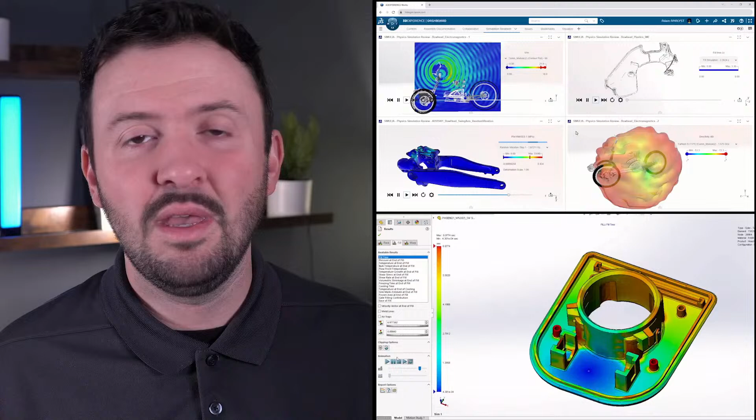Today's guests are here to provide 3 sneak peeks at World, the big announcement areas to look forward to, a special preview of our technical session agenda, and more broadly, other great ways to take note of when it comes to experiencing the best of simulation solutions and technologies at the event. Our guests today have 2 remarkably different backgrounds when it comes to simulation. Our first conversation will focus more on usage and technique adoption, while our second planned conversation will delve deeper into new features and functionality planned for simulation users.

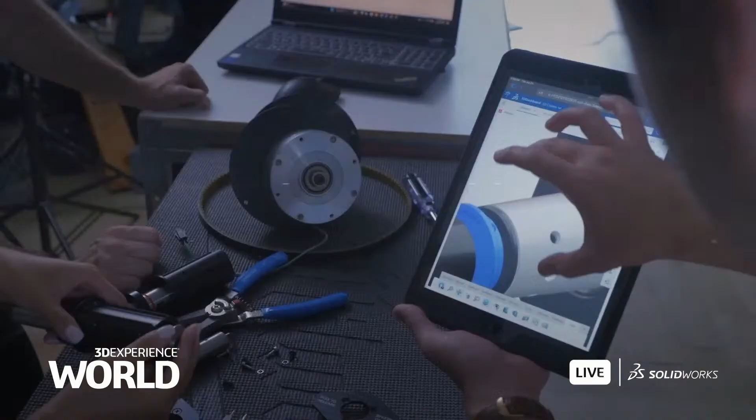I mentioned we had a bit of a talk before we came on about the different topics we cover, and one of the things I said to you is it might be good to bring everyone up to speed. As we know, within design, simulation, manufacturing, there's a ton going on all the time at a software level. So within your eyes, over the past year here in 2024, what were some of the key highlights, or newsworthy items as it pertained to simulation?

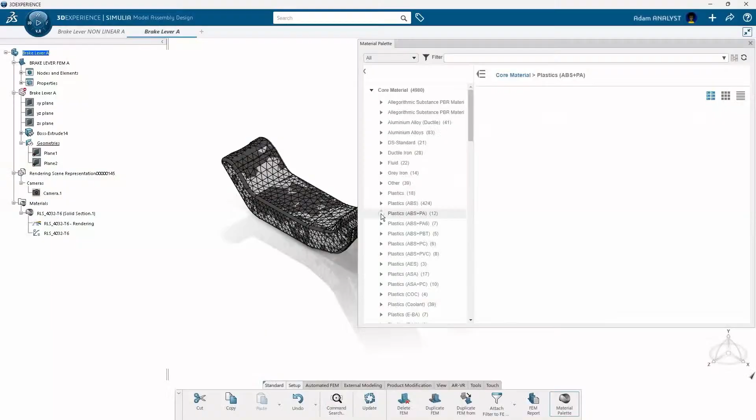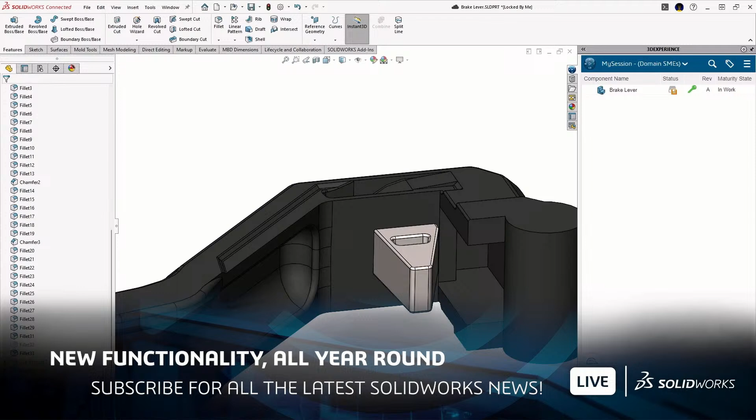That's a great question. I would break it into 2 parts. First, in terms of the portfolio, the simulation portfolio that's now being offered as a part of 3DEXPERIENCE Works, it's pretty comprehensive, from structural simulations to fluid flow and thermal analysis, to electromagnetics, to plastic injection molding, to motion simulations. So this portfolio has been quite comprehensive. What's new this year is there are a lot of new capabilities in terms of preparing the geometry for simulation, overall performance, pre and post processing, really improving the user experience and expanding the number of applications that our SolidWorks users can address, leveraging the 3DEXPERIENCE platform.

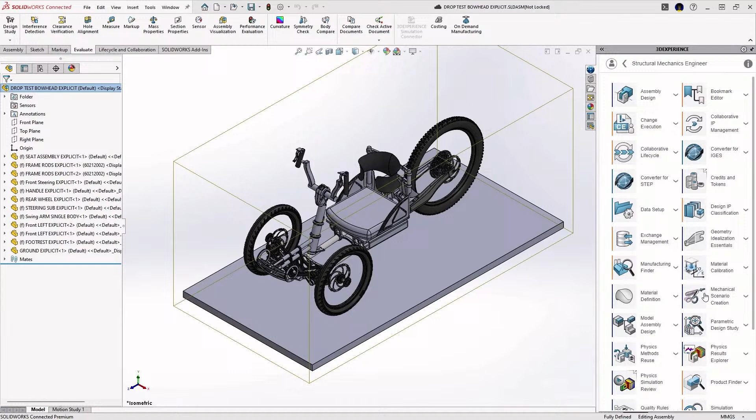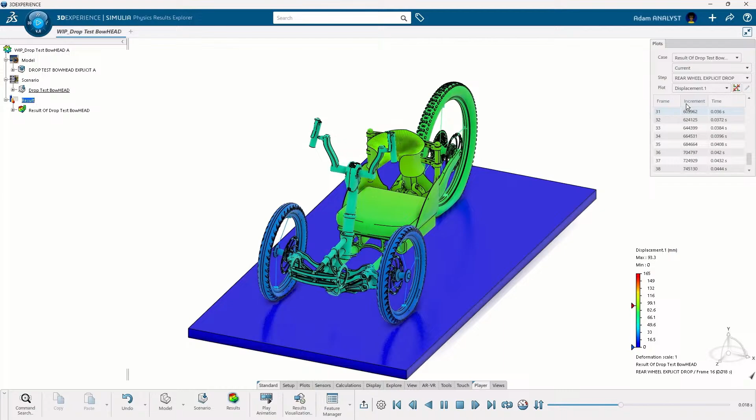No doubt there's been a significant increase in the capabilities we are offering in the simulation portfolio, on the Works package. But on the other side of things, which is our customer awareness and customer engagement, that has ramped up quite significantly. In fact, this year I'm very excited to share that we did Simulation Week in Latin America, in Australia, in Europe, in India, and in parts of Malaysia, where we had the opportunity to meet and interact with thousands of SolidWorks customers, and they're pretty excited about what's happening in the world of simulation, especially bringing the power of cloud simulation and all the amazing SIMULIA technologies to the hands of SolidWorks users. So I would say these are the two major highlights of this year: the ramp up in capabilities within the simulation portfolio, and lots of customer engagements, thanks to our channel partners and resellers, because without them this would not have been possible.

That's super exciting. As a fan myself of meetups, I go to different industry meetups, not necessarily because I work here at SolidWorks, but just because I like to. I find them enriching. You never know what you're going to learn, whether it's about a given individual, an industry, or a software package. Hearing that we've connected with thousands of people across these different sites and geographies, that's really awesome.

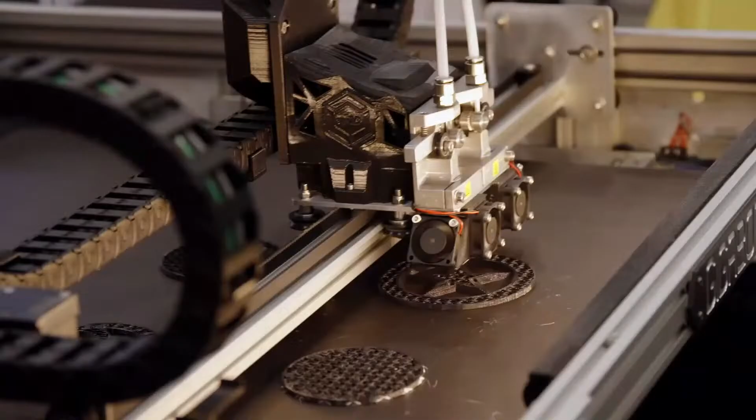And I can say for anyone watching this episode today, you're probably interested, if not already secured, to go to 3DEXPERIENCE World 2025. It's all about in-person networking, learning different things, and so forth. But Srikrishna, we are of course 3 months away, give or take, from 3DEXPERIENCE World. This is airing in December, middle of December. I wanted to ask you, people know that this conference, when it was called SolidWorks World, as it's now known as 3DEXPERIENCE World, they know that especially day one, and then bleeding into the rest of the days here at World, it's really known for those big splash announcements.

Now, I know you can't spoil the announcements here, but can you maybe tease some things? Tease some of the big announcements, or some of the new things that we'll be hearing about simulation at World.

Let me take a step back here. I think for me, one of the big deals this year is that until 3DEXPERIENCE World 2024, we would have domain sessions after the general session. This would happen probably in the afternoon or so. These are exciting, when we're talking about design, simulation, manufacturing, and so on.

But what would happen is when these domain sessions were taking place, you also have a lot of user breakouts. So the majority of users would miss out on the big updates being made in a particular domain session, be it simulation or manufacturing and so on.

This year, for the first time, we are going to have a big multi-domain segment within the general session. It's going to be a 90-minute long segment from 9 a.m. to 10:30 a.m. on Tuesday, which I believe is day two. Simulation is obviously going to be one of the key pieces.

So I'm quite excited about simulation being part of this general session where we're going to have a lot of fun. We'll have a couple of customers come in, and also we are working on a skit, which I hope our SolidWorks audience can find amusing. And the two customers we are showcasing have completely diverse and contrasting sets of products that they're working on. That's all I can say at this point in time.

You mentioned how people can come together, learn about different technologies, learn from one another, learn about different industries, how to use tools to advance your own products, your own dreams, your own visions. One thing I'd like to get more detail on here is the technical sessions, which we know within our audience is a big reason why people take time out of their work days to travel to that one place where you have thousands of like-minded, skilled individuals teaching, whether in classroom sessions or hands-on sessions. So what can you tell our audience to excite them about when it comes to simulation there?

Sure. This time we have quite a lot of exciting and wide-ranging technical sessions planned on the simulation domain. We've got a total of 16 sessions, which are going to be product briefings, where we'll have customers coming in presenting their use cases, the challenges they were able to overcome by leveraging unified modeling and simulation, and the engineering and business benefits they got from our solutions. We'll also have some Dassault Systemes partners come in and talk about tips and tricks, especially for our desktop products, be it SolidWorks Simulation, SolidWorks Flow, and so on.

Then the third segment, which I'm very excited about, is where we're going to talk about the transformation of our standard or legacy SolidWorks customers into the platform, and how simulation can be one of the key drivers or first entry points into the platform. We've got several sessions on this transformation topic, more domain focused, from a structures standpoint, fluid dynamics, electromagnetics, and plastic simulation, and so on. So these are all the product briefing sessions, which can be broadly classified as tips and tricks, which has always been the favorite for our SolidWorks attendees.

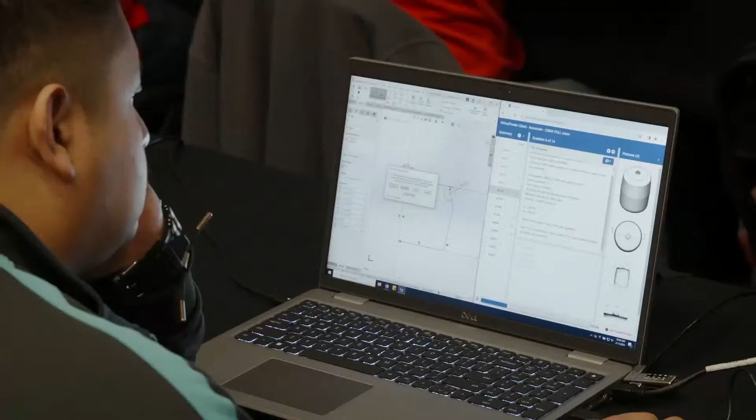So these are product briefings. Then we have hands-on sessions, which is a great opportunity for a SolidWorks user, irrespective of his or her expertise in simulation, to learn about simulation itself. We've got 6 of these sessions planned, going from beginner to intermediate, covering different simulation disciplines. These are 90-minute sessions, so you get to learn a lot - a quick boost of learning regarding simulation.

And the last, getting to become my favorite part, is the meetups. We've got 2 meetups planned. One is focused on educating our SolidWorks users about why a typical mechanical engineer or designer should consider fluid flow simulation in their design process - what are the benefits, and what should be the learning curve or path? The second meetup, which I'm super excited about, is going to be a sci-fi themed panel discussion with all the customers who are present. We've got about 5 or 6 different customers who will be presenting at these breakouts, and we're inviting all of them to a panel discussion, but making it fun with a lot of sci-fi references. So that's the technical breakout for you.

Well, the reason I say whoa - I think a lot of us can agree that when you see a lot of posts on LinkedIn about this kind of stuff, it's like when you're able to open your mind, and a lot of us have been interested probably since childhood in sci-fi. When you open your mind up to different capabilities, different possibilities, perhaps some of those may manifest in the future - whether that means picking up a new tool or trying something differently. So it's not all fun and games, because you're exercising that muscle that is your brain in a way that will hopefully one day be productive and possibly even lucrative.

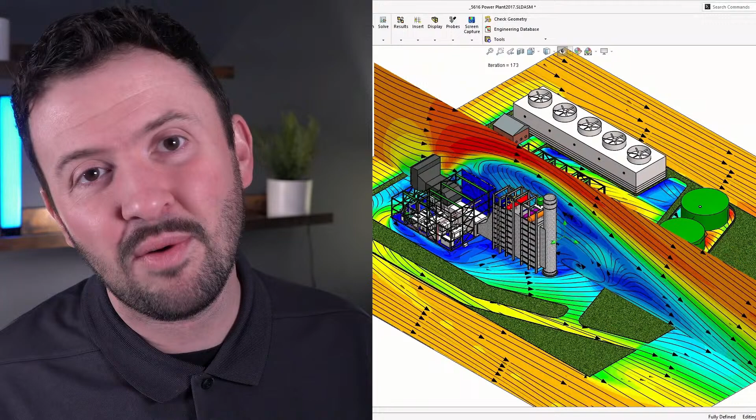Delphine, welcome to our official 3D Experience World sneak peek here on the SolidWorks YouTube channel. How are you? I'm doing great, what about yourself? I'm doing awesome. Yeah, we're here in December, just a few months away from 3D Experience World 2025. It's hard to believe. But Delphine, I brought you on to offer our worldwide audience a preview of what's to come.

As it pertains to simulation at the conference, be it announcements, technical sessions, and much more, coming up at 3D Experience World 2025, once again in Houston, Texas, this upcoming February. You can go out to 3dexperienceworld.com. I can pitch it for days, but before we get to all of that, and trust me, we will, I thought it best to quickly bring everyone up to speed, because as we know, we're in December, it's the end of the year, and a lot has happened here in 2024.

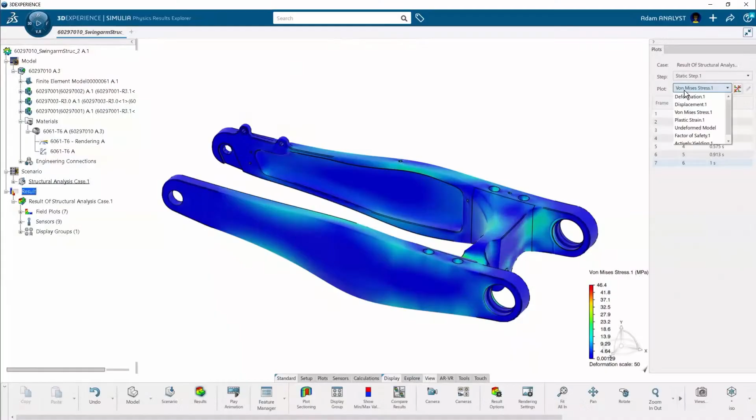So Delphine, I wanted to ask you, what were some of the key highlights or newsworthy items within simulation this year, 2024? Thanks for asking. 2024 has been a busy but fantastic year for the 3DEXPERIENCE simulation community. We've been busy and happy, I would say, if you want to summarize it. Our user community has been growing in many industries, in companies designing from very large to very small products. If you think about high-tech industry, for example, with miniaturization. So we met with many customers, which was great.

One of the customers that just joined the community that I would like to mention is Eleiko. Eleiko is from Sweden, Europe, and they are a new user of the Simulia structural mechanics engineer role. This company is designing and manufacturing precision craft strength equipment. When you go to the gym and you want to be healthy, this is what this company is doing. And they adopted 3DEXPERIENCE Works simulation, and they shared with us that they can now perform complex drop tests on their bar directly in 3DEXPERIENCE Works simulation, a big time saver, and the opportunity they have.

So Delphine, it's like a pull down bar. Is that the idea? Yeah, exactly. And when you think of that product, it's pretty simple.

It's a bar, but when you discuss with them, you really discover the complexity of designing a sustainable product, which is important for them, high quality from a material standpoint, and the strength of their bar. So that was really eye-opening because sometimes when you look at the product, it seems really simple in our life, but the engineering behind that is pretty complicated. So it was great to discuss with them because they've been able to really now use simulation during their design process to accept or reject some design ideas, saving them time and money. So I thought it was an interesting product to mention.

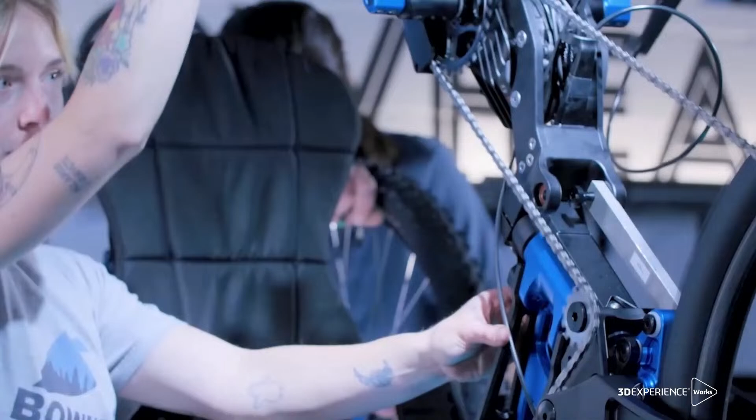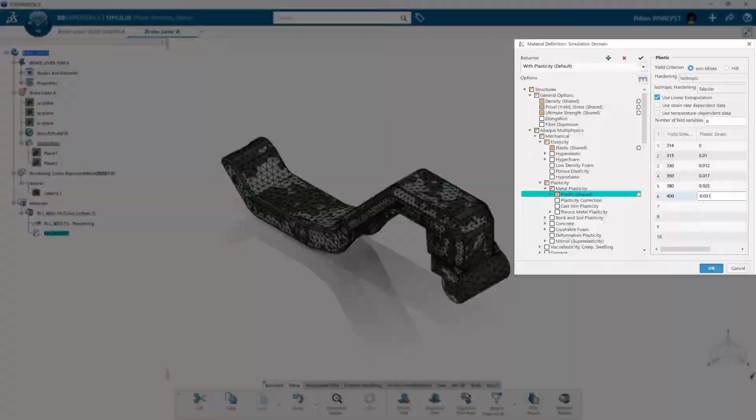I think so. Yeah, as someone who uses those sorts of machines, as many of us do, I'm sure at given times it makes a ton of sense. An object that's just sitting there in physical space, not being used for any purpose, of course, why would we run any simulation on it? But when we think about the risk potential for injury in terms of its application of use, yeah, that makes a ton of sense. Of course, you need to make sure the materials are proper. You're putting them through real life scenarios so that we can understand, hey, this is okay to be used in a workout and training scenario. So, no, that makes a ton of sense. That's really exciting, and it's good to know as a user of those devices, of course, indeed, right? So they, we are, say testing, that you can use it. So, yeah. So that was cool, to see that community growing with, again, a different type of product.

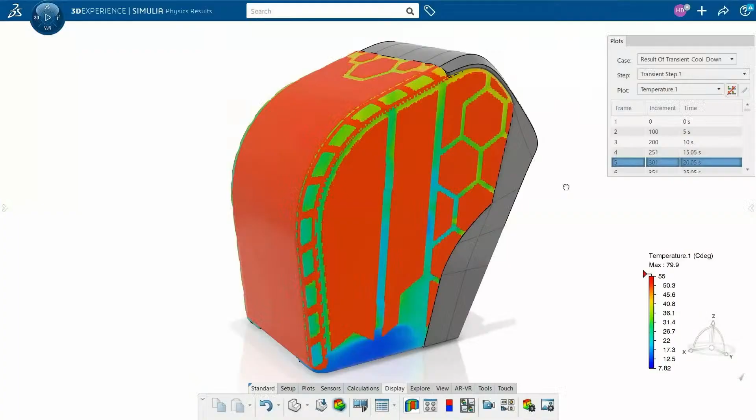Then, I'm coming from Simulia R&D. From an R&D standpoint, we've been very busy as well. We've been working tightly with this customer and the CRE team to enhance the 3DEXPERIENCE simulation portfolio for all domains that we support. I'd like to mention 3 projects that we really worked tightly with you guys on. The first one is that we have investigated multiple designer-centric fluid flow workflows to strengthen the role called Fluid Dynamics Engineer, which is delivering value for fluid flow simulation. We delivered multiple enhancements in the result exploration domain for intuitive and efficient result post-processing, as well as the modeling aspect of fluid and solid domains. So our goal is really that any 3D customer that is designing a product submitted to fluid flow, imagine an airflow or a water flow or any type of fluid, as well as possible heat transfer, can now assess the performance of his product with this role.

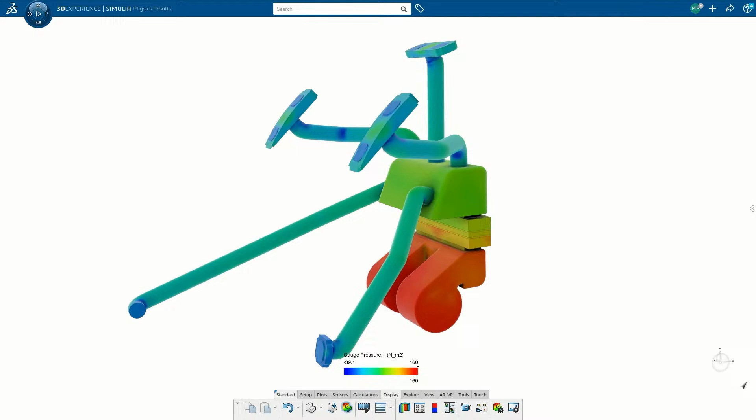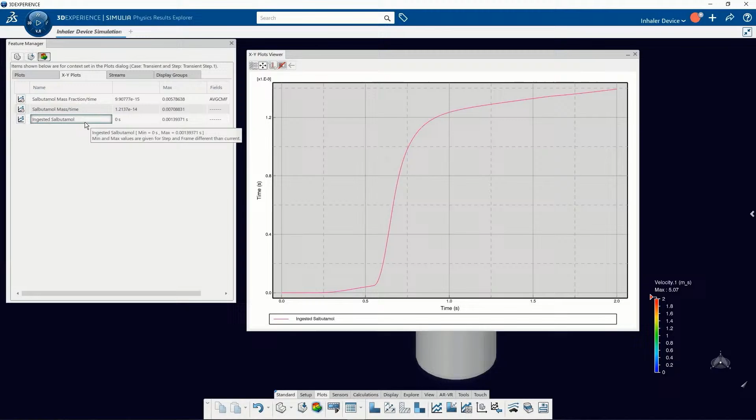Yeah, so that was really an exciting project, and I'm going to mention that a bit more during the event, of course, as you can imagine. So stay tuned. Another project coming directly from the 3D community is in the electromagnetic domain, and of course more and more products are connected. So EMAG simulation is becoming more and more important, and we've been working to enhance a role called Simulia Electromagnetic Engineer to include what we call low frequency simulation, because lots of connected products are working in what we call low frequency.

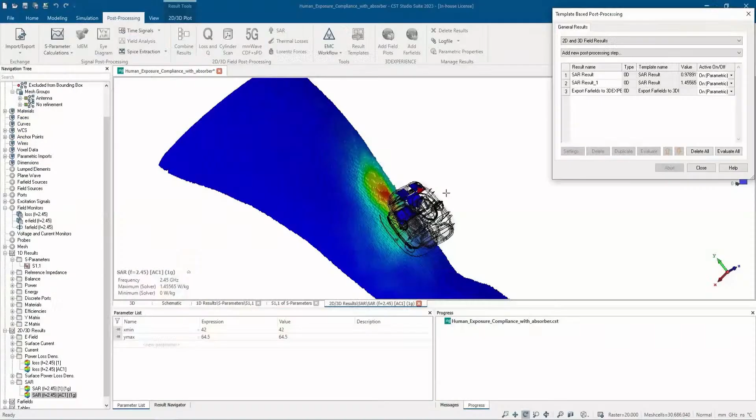So we have a dedicated solver for that, now available to 3DEXPERIENCE customers. Any customer designing a high-tech product will now have the right solution for performance assessment. Tremendous, and like you mentioned, that's many products. I'm sure many products right near me are operating that way. Definitely, all around us.

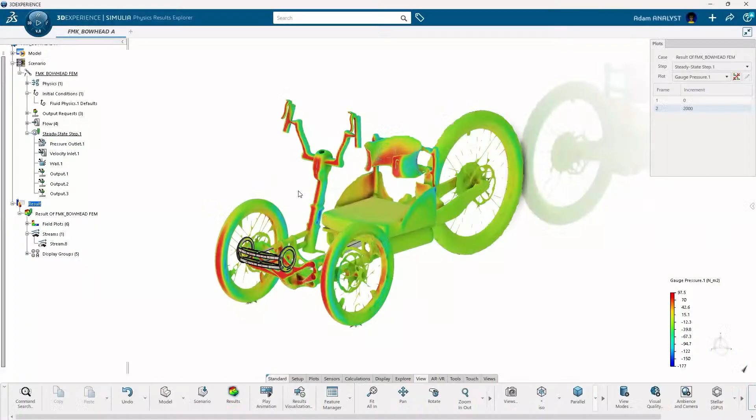Let me mention another project related to result exploration, because at the end of the day, this is why you do simulation - to look at the result, the behavior of your product. We've enhanced drastically the performance of result exploration on very large models on the cloud. As you know, we are a cloud solution, and the cloud is removing hardware barriers, so any company of any size can benefit from virtual simulation. With this new technology, called pixel streaming, our customers can now investigate very large simulation results efficiently from the cloud directly.

Okay, yeah, you definitely had my interest when you mentioned pixel streaming. We'll have to come back to that during the event, because we're going to showcase many examples of large models. Really, the cloud is helping us fully democratize simulation - not only cloud compute, because often we think about compute, and we do that as well, but the post-processing aspect is very important too, because that's why we do simulation. That's extremely true. Having delivered a lot of these presentations and witnessed them, we typically think of compute in that way, so it's important to understand the post-processing aspects.

It's funny, we're going backwards a bit and thinking about how 2024 has gone, and all the improvements and enhancements and developments that not only we've made in the software, but also that our customers have made in terms of using the software.

Now I'm going to look forward, and once again you don't have to give me every spoiler, but we know that 3DEXPERIENCE World is often seen as a big splash zone for announcements of new things, improvements, new features, new products. Can you tease some of the things we might be hearing about in February? You don't have to give it all away, just some of the things we'll be hearing about, since we don't want to wait for the event that we're all looking forward to attending.

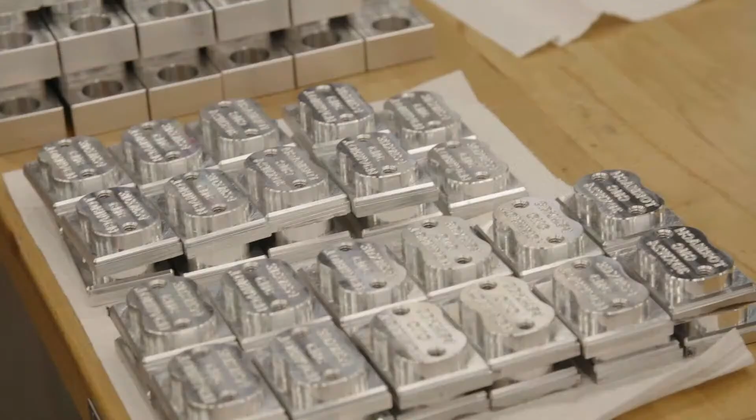I really feel, having been to 3DEXPERIENCE World for many years now, that we are all coming to this event to learn new capabilities, the new tools that we're going to offer. Customers want to do user sessions to learn during technical sessions, but they also want to learn from their peers. They want to listen to them - it's a big network event when customers have the opportunity to share and learn best practices, to learn how their peers are tackling very similar challenges. So for me, at the event, yes, we're going to have some announcements, and I'll come back to that shortly, but it's also all about learning from customers.

One important session I'd like to highlight as a preview is the session we'll have with customers on stage. We'll have the pleasure during the general session on Tuesday morning to be with two 3DEXPERIENCE Works simulation customers, to learn about their engineering journey and share with the audience how they benefit from simulation, so other companies can get inspired. I can announce the two customers who will be with us on stage.

The first one is Caloi, a major Brazilian manufacturer of bicycles and bicycle equipment, along with motorized cycles. When we meet with them on stage, the audience will learn how virtual simulation is becoming a key pillar of the engineering transformation for the current bike, but also to answer the required transformation towards efficient e-bikes. This company is well known for bikes, but they have new challenges around batteries, for example, to develop a new generation of e-bikes, and we'll go through that with them.

The second one, I'm sure you will love it, because it's not a typical one - the company is called Seneca Dairy System.

Seneca Dairy System is a full-service dairy solution provider, and you will hear about the design project from them and how unified MODSIM is helping them keep the cow happy and make great milk.

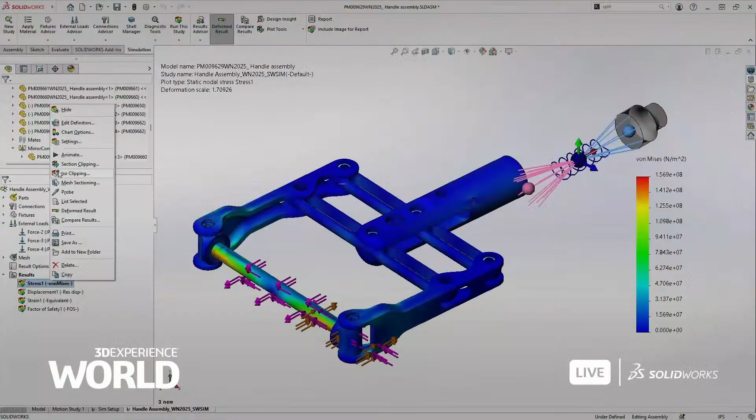This is of course an important reason why people go to the event - they want to learn, and the technical sessions are a great way to do that. The agenda is full of sessions, so I'm sure you will love all the sessions offered to you guys. We have lots of exciting sessions for 3DEXPERIENCE Works across the simulation portfolio for all domains, because the products are becoming more and more sophisticated, with more and more physics applied. So we're going to cover structure, fluid, electromagnetic, motion - all the physics that SolidWorks customers will need.

What I'd like to highlight specifically is what we call the masterclass on customer story. Coming back to the fact that we're here to learn and to listen to our peers, we're going to have these masterclasses with customers, where they will go in more detail about their engineering journey and the KPIs they had to answer.

You may remember one of our star customers last year was the company Cargos. Cargos is designing and manufacturing a completely new generation of electric cargo scooters for sustainable logistics. Last year they came from India with one of the electric cargo scooters and presented how 3DEXPERIENCE simulation transformed their engineering process. They are really our star customer, and they're back next year to present their transformation journey and the progress they've made. During one masterclass, they're going to present the aerodynamic design and battery engineering of one of the new electric cargo scooters with a unified ModSim approach. This is one I can only advise you to attend - that's going to be really interesting.

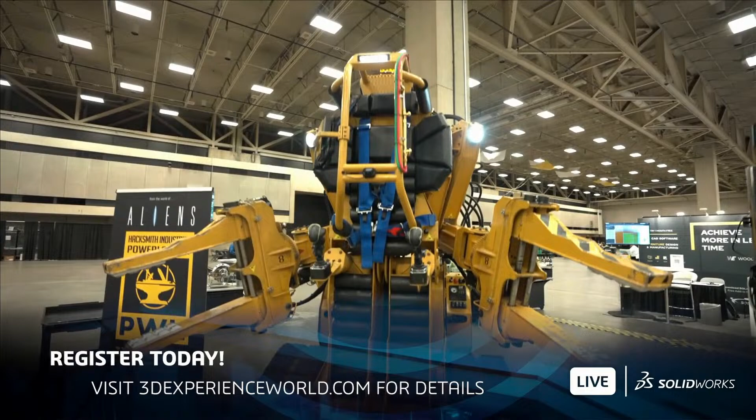Within simulation specifically, you might stop by and find an analyst from a company in Canada, or a company from India. You're tapping into all these resources that, sure, you could access online in a forum or via a Zoom meeting, but having thousands of people face-to-face is different. Anyone who's gone to a good meetup knows that.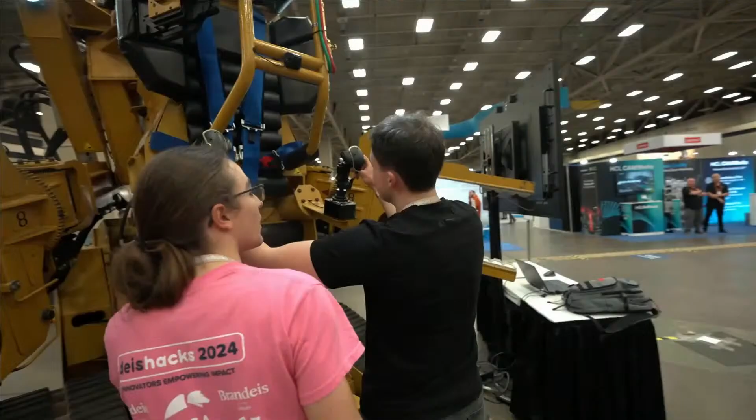What's funny is that sometimes a discussion starts between a customer and a Dassault Systemes employee, and then customers around continue discussing together, saying 'oh, you've seen that, I love that,' because they get inspired and share that inspiration among themselves. This is really one of the key values of the event, and I'm really looking forward to being in Houston in 2025.

Me too. All right, well Delphine, we have a lot in common. I'm sure we could share things we have in common that our users would love, just meeting each other, learning about tools, learning about each other's processes. But once again, thank you so much for jumping on, I can't wait to see you in Houston. Yeah, same for me, thank you so much. See you soon.